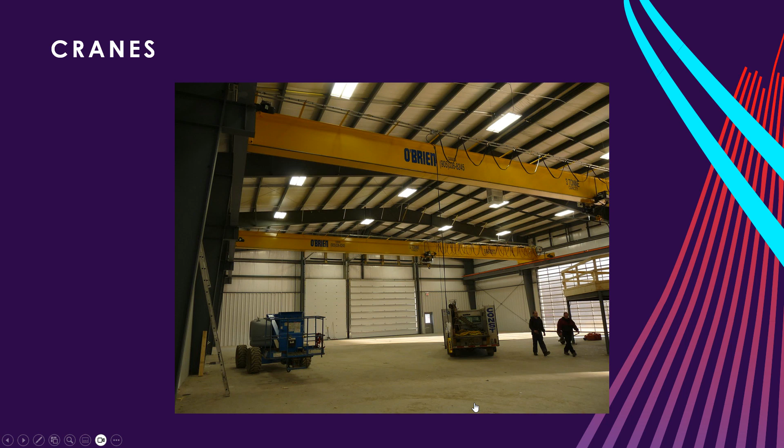All right, there's part two of our discussion on cranes.

Add stiffeners in a runway beam. If you have a crane bracket, you're going to want to add stiffeners at the end. It's good practice, and if you have a step column, same thing—you want to line your stiffeners up with the flanges on the column. Don't connect the beams; you'll get cracking there at the bolts. You want to allow these things to rotate. What you don't see is the bolts right here and here. We talked about that in our previous video.

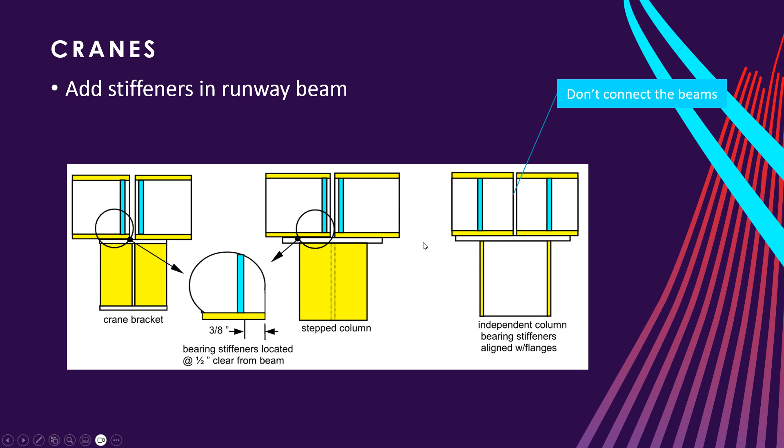You've got various methods of runway beam design. A W is the easiest, a W and a channel, and then the rest of these three configurations are if you're really in trouble—if you got larger cranes, you can do that. This channel and W section is efficient, but unless you're a fabricator of great talent, it's not practical, because this is a little bit stronger due to the flange on top of the W section.

So here you'd just use plates, right? This is welded in the shop, so it's just not something that's practical, certainly not something popular. Over here on the far right, when you have a large, say category E or F crane, you start trussing this thing out. You start putting vertical web members in there to kind of get that deflection down.

And then here, horizontal issues you've got. Now here it says continuous plate—what that's usually used for is if you have a cab operated crane, you've got to provide a walkway for them. So you might as well use that continuous plate as the walkway and as part of the structural design. On the opposite side of the cab, instead of using that continuous plate, you would just truss it out. It's just an efficiency thing.

When you're designing any of these cases, remember your lateral load is at the top of the rail. So the rail size is something you need to obtain from the crane manufacturer before you start this whole design process. You're going to have to deal with that rotational load there.

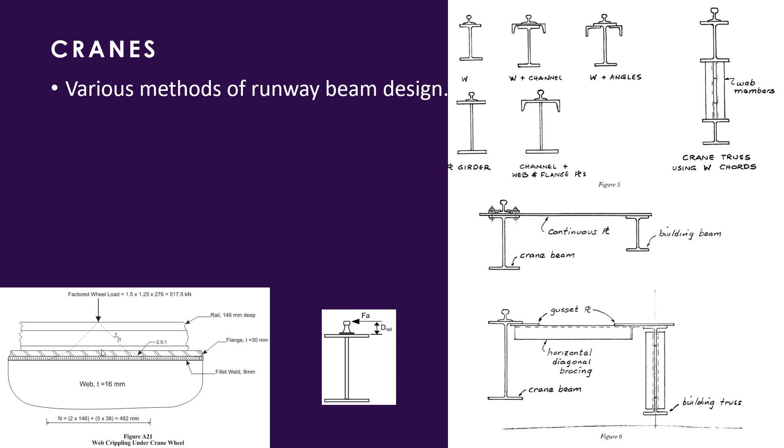The other thing you've got to look for is web crippling on the beam. So if you've got a load on the rail, this is how to determine the area of the web that's being checked for the wheel. You usually don't have problems with this unless you have heavy cranes on short spans—the short span allows you to use a smaller beam with a smaller web, and that's where you run into issues.

If you have a case where the runway beam on the right is a bigger span than the one on the left, you would just step the column like this. You can, in theory, change the slope of that flange, but it's just more welding, more opportunity for things to go wrong. You're just better off to step the column—it's a lot cleaner detail.

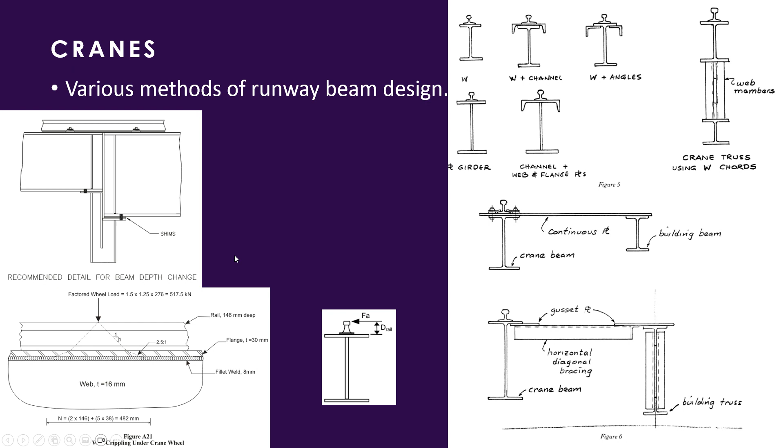You've got to select compatible members when using a built-up member. Here you can see there's like a 3/4 inch from the fillet to the flange, but you can certainly check that. If you look at the back of AISC Design Guide number 7, they have a bunch of combinations that they've already checked and say that works. Interestingly, I've found some combinations where that 3/4 inch rule doesn't exactly fit up or meet that criteria, but I contacted AISC about it, and they said they've been using these for years and that works just fine. So you might see some combinations that don't fit this rule, but you need to make sure that they can get in there and weld that.

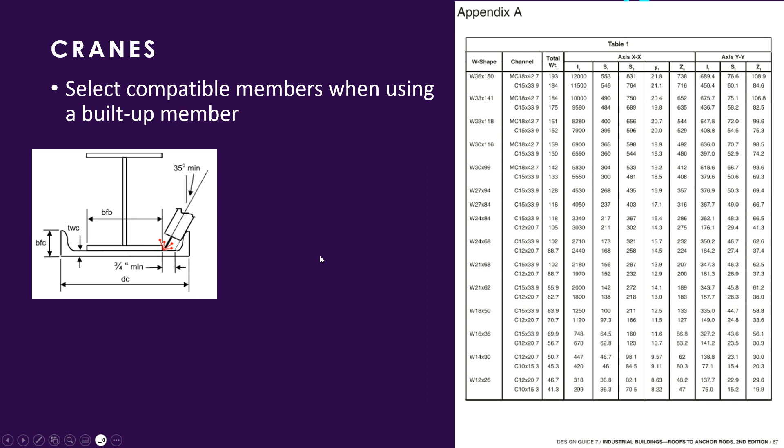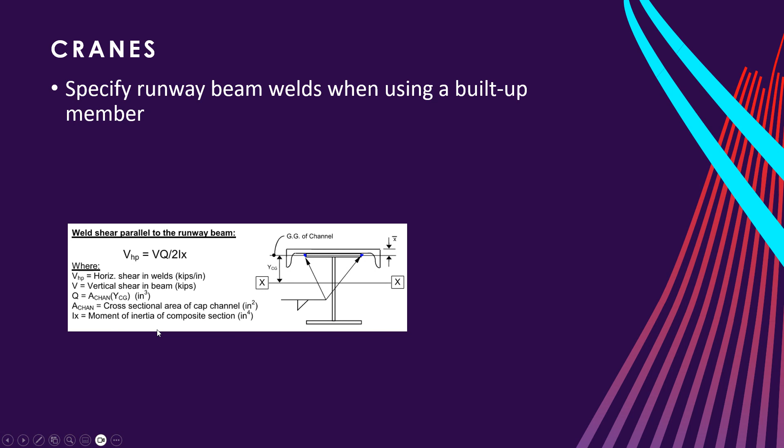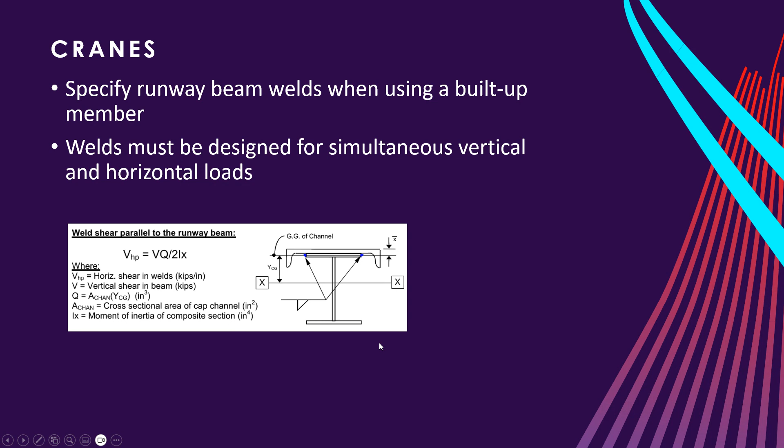Specify the runway beam welds when using a built-up member. You have to design that weld for simultaneous vertical bending and horizontal loads, so you've got to pay attention to how you're designing those welds.

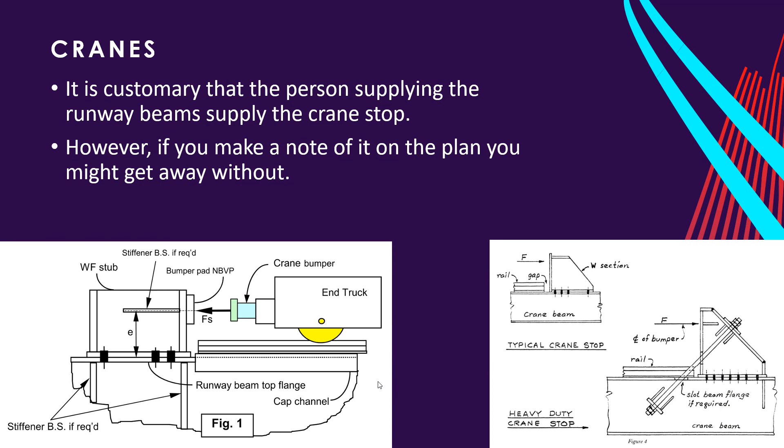The main reason the person supplying the crane runway also supplies the stop is this: you can specify on the plan that the crane manufacturer has to supply the stop, and you might get away with it. But because the crane manufacturer isn't getting paid to do the runway, they don't want to add that extra thing in. So you could potentially get away with it in the note, and if someone's smart enough, they'll pick that up. But in my experience, you'll get an RFI at the end saying, give us that information.

Hook bolts or clamps must be used to fasten the rails. You cannot weld rail—rail is not weldable, so it creates a brittle weld.

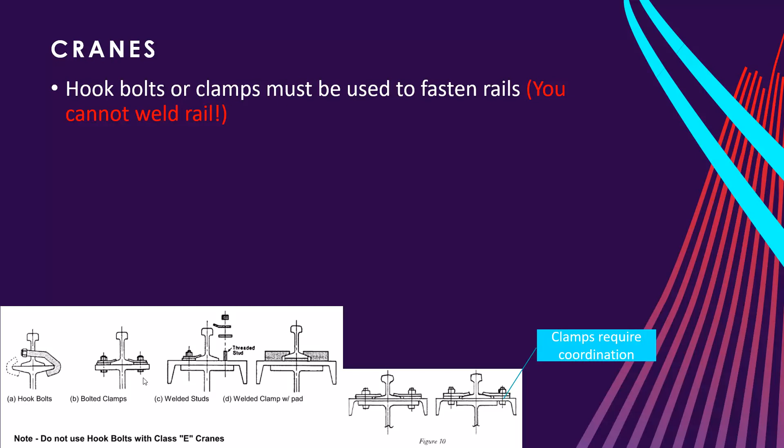Some companies use 2-inch square bar as a rail, categories A through C. It's fairly common nowadays, but there's debate on whether it's the right thing to do or not. But that's not our problem.

The 2-inch bar must be welded down. There's no bracket or anything, so that's not an issue. But because the bar is so heavy, it does require preheat. And in Michigan, where we are, try to preheat that in February—it's just not practical if it's outside, so they usually have to enclose the building first.

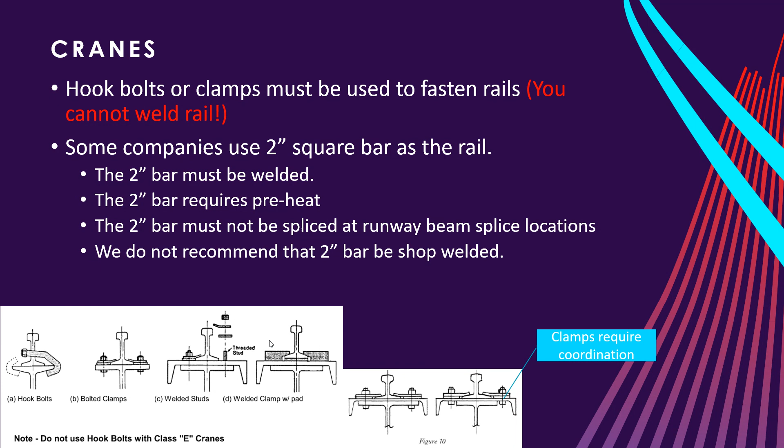The 2-inch bar must not be spliced at the runway beam splice location, so you don't want to do that. We don't recommend that the bar be shop welded. Number one, it doesn't give that nice straight line. Number two, you really don't want to have the bar have a half-inch gap or whatever you're going to put between the runway beams. You want a section of rail that goes over the top so that as that thing flexes, you're just not going over the top of that splice.

At the 2-inch bar splice locations, it's customary to do a little PJP weld and then grind it flush so that the steel wheel running over the splice doesn't thump. It's very common to do it that way. And if you see that weld crack, that's okay—it's common. Again, it's just for making the ride of that steel wheel on the bar smooth.

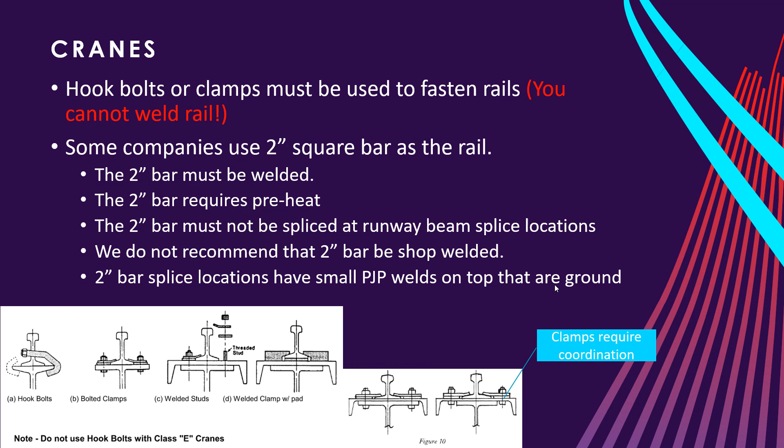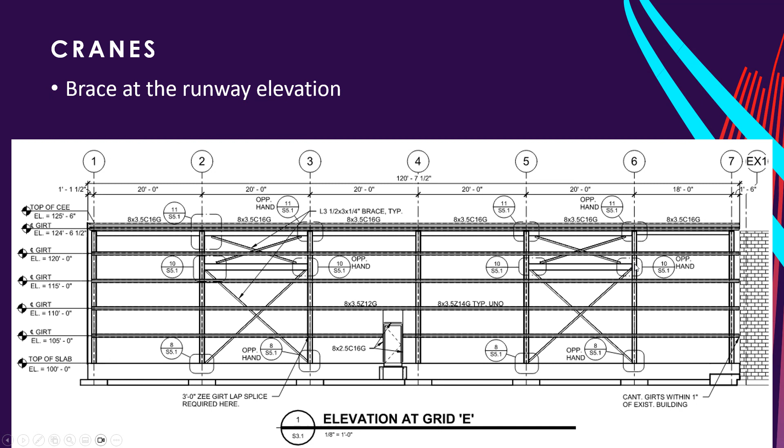Brace at the runway elevation. Here's an elevation of an exterior wall—you can see the girts, but we have that special brace there. This would be the runway elevation. The idea here is that as that crane stops, this X-bracing is very stiff, and we're going to stop any kind of movement in the longitudinal direction of that crane.

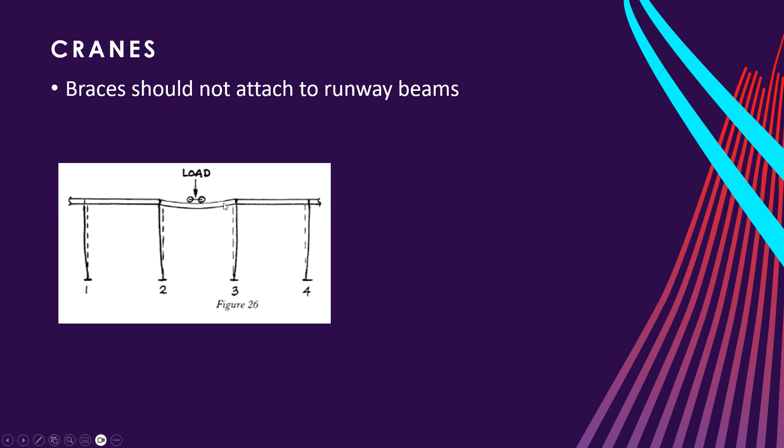Braces should not attach to the runway beams. Obviously, as that load goes over, that runway beam deflects. If you do brace to that, you're going to put load in the braces, and you'd have to design that for fatigue—just not optimal. So if you do something like this, just separate the strut from the runway.